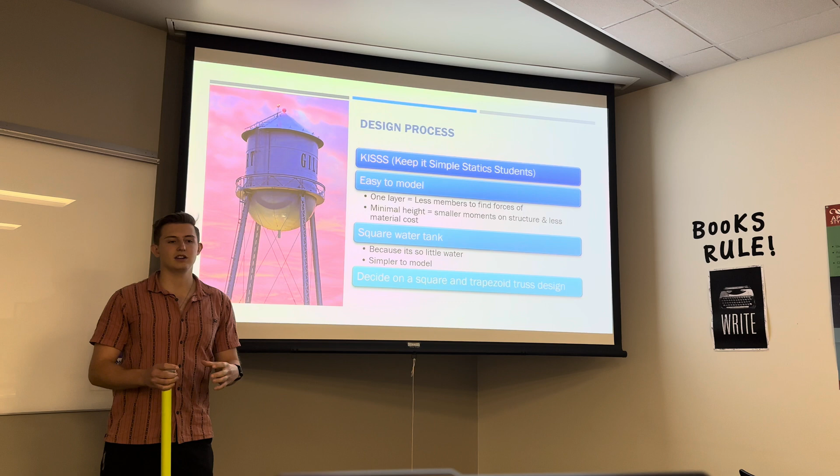Along with that, going along with making it easy to model, instead of making a round tank, we made this tank square. We were able to do that because there was so little water in the tank, so it just makes more sense to make it square, especially looking up all the ones online. A 300-gallon tank was square. And additionally, our final 2 designs were a square truss and a trapezoidal truss that you'll see further in the presentation.

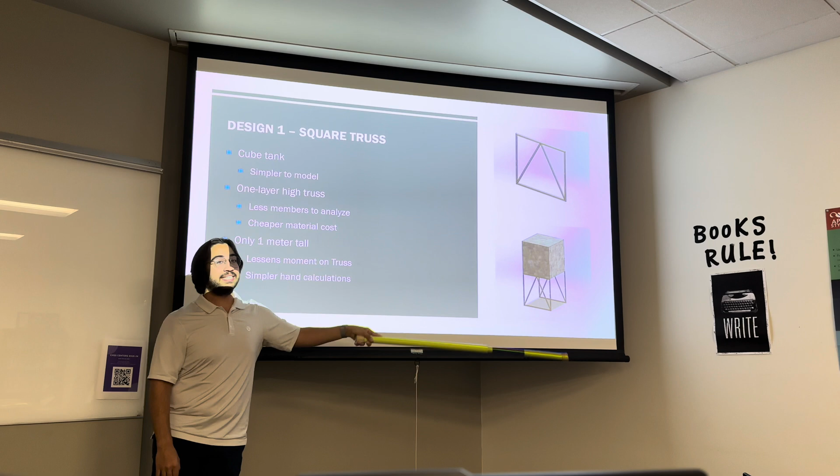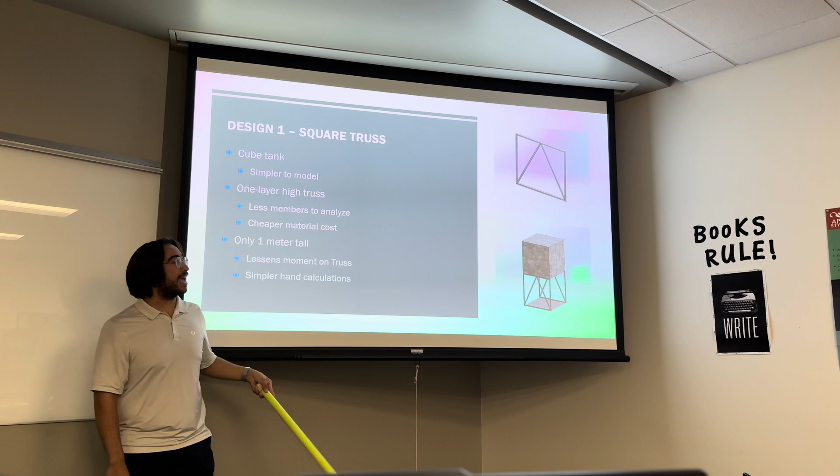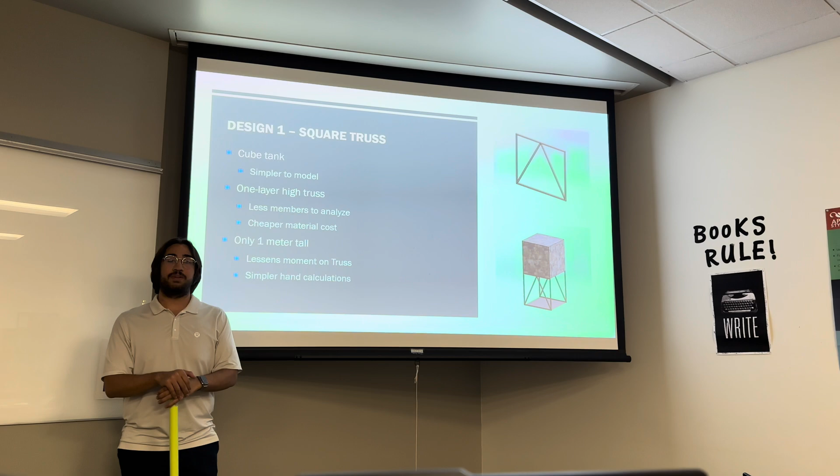We're using a cube tank because this is simpler to model. This is going to be made out of galvanized steel. And then we have a 1-layer high truss as seen over here. That's just simpler to model. It has less members to analyze. It's a cheaper material cost. We're using AISI 1020 steel, which is readily available. We are also only making it 1 meter tall due to the lack of a height minimum. And this lessens moments on the truss and it's simpler hand calculations for all of us.

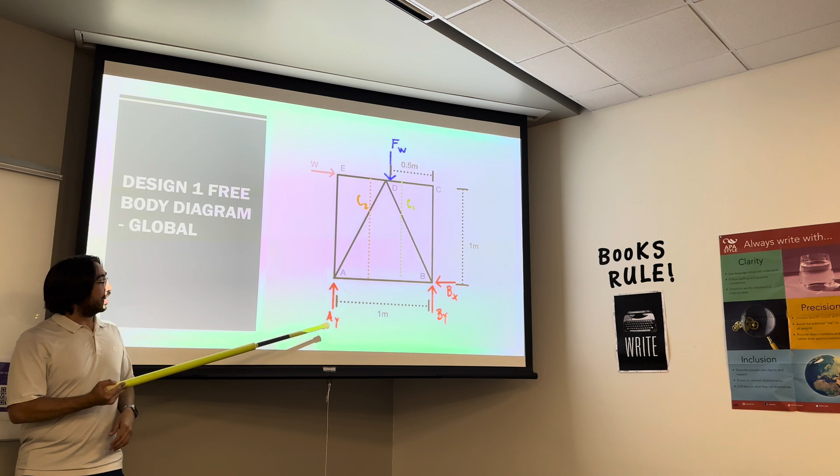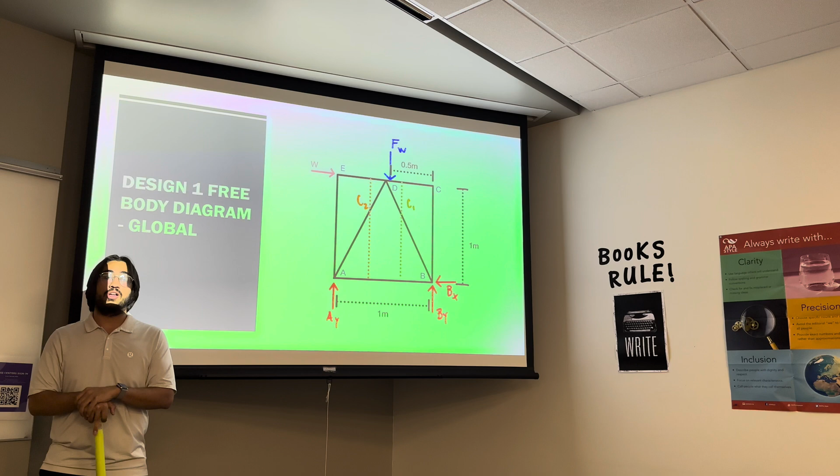This is going to be our global free body diagram of the first design, our square truss. We have our roller at A as well as our pin at B, and this global helps solve for those. The wind force at the top left was calculated using the average wind speed in the area. The force of the water at the top was the water alongside the tank as well. You have C1 and C2, those are going to be our two cuts, which we'll see in the next slide.

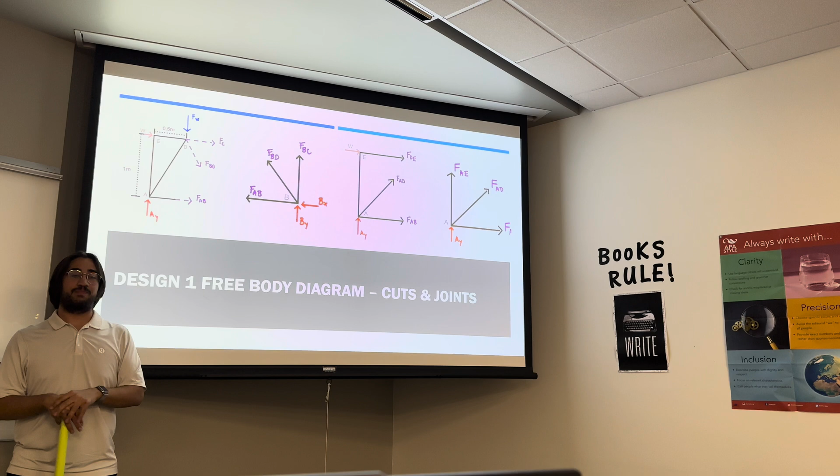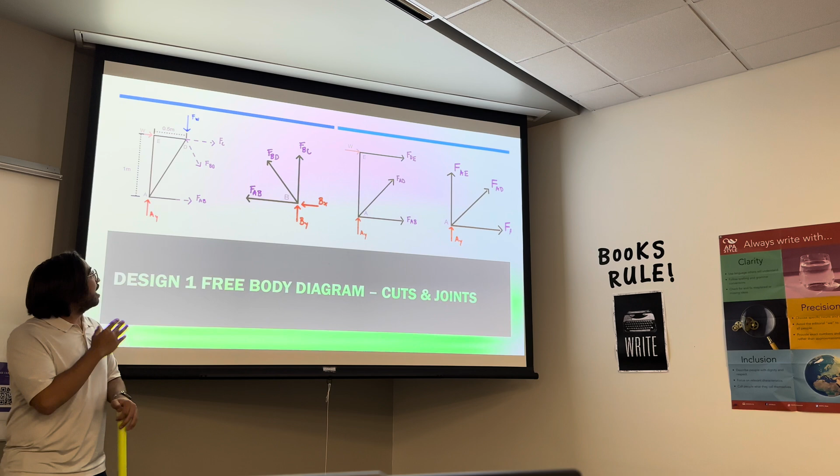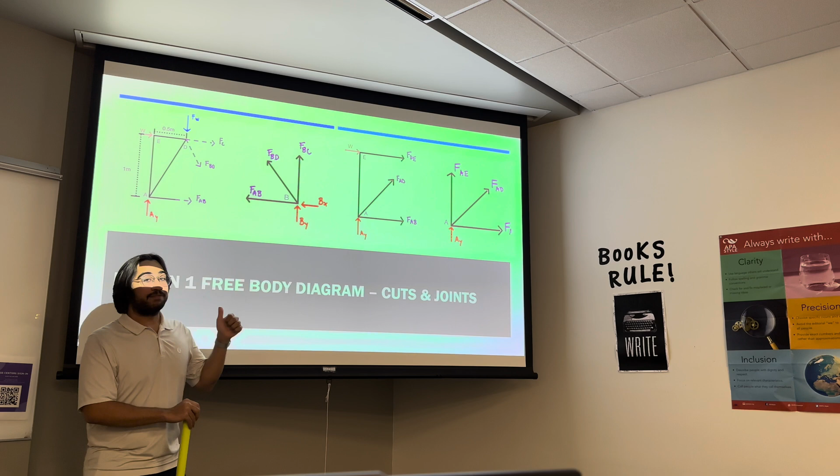These are our free body diagrams used to calculate our truss forces. So in the first cut, we're using AY, which we calculate with the global, and we're finding FAB, FBD, and FC. In the next one, we're using that FAB and FBD, and we're calculating FBC. And then we're also going to go on to the next cut, where we're using FAB from the first one as well to calculate FAD and FDE. And finally, we're doing another joint, and we're calculating FAE as well as FAD.

Our second design is our trapezoidal truss. This is using a rectangular tank, also made out of galvanized steel. And then we are using a one-layer high truss, similar to the first design. This is, again, less members to analyze. Although this truss features a wider base at 4 meters. Because it is obviously a wider base and more material, it is going to be more expensive. And this is, again, going to be only 1 meter tall.

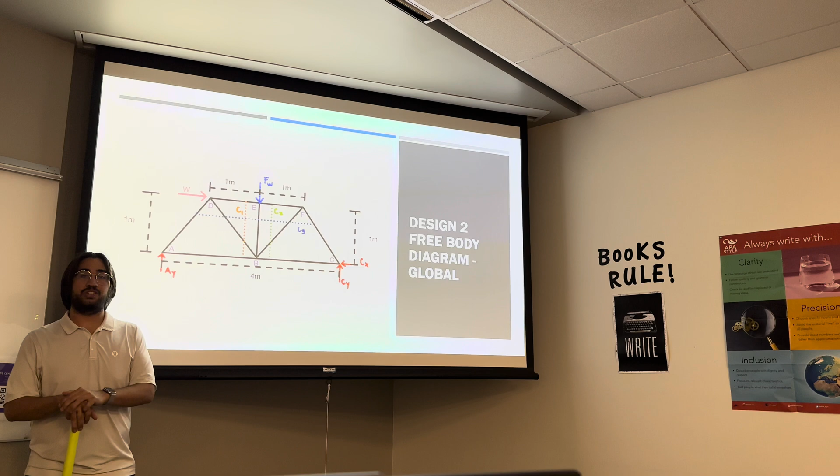This is our global free body diagram for design 2. It is going to be with our roller at A as well as our pin at C. The global, of course, is going to help us solve for those reaction forces.

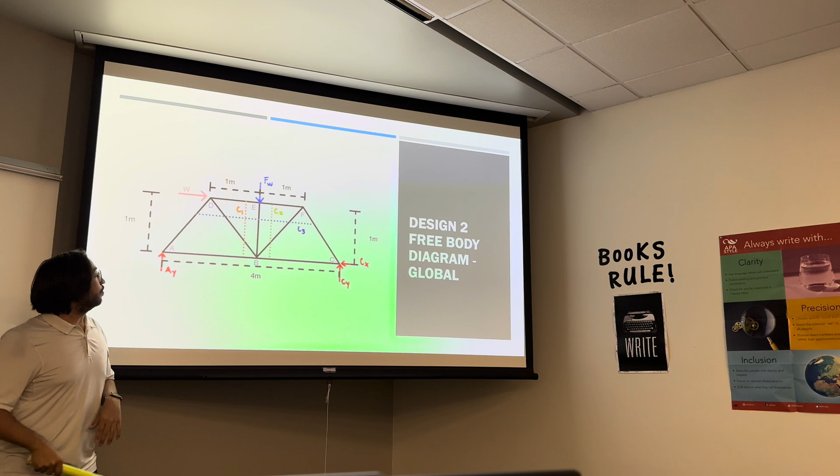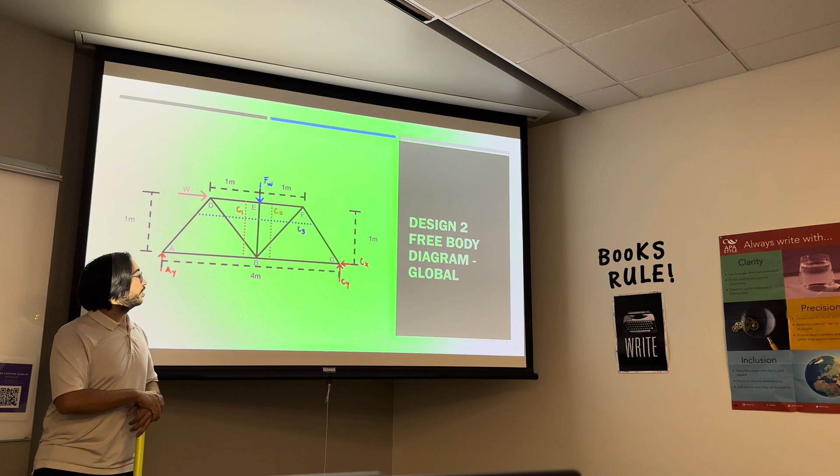We also have 3 cuts on this one as opposed to 2 on the previous, just due to it having more members. And then the wind force is staying the same. The force at the top, due to the water, is obviously going to be heavier because of the larger tank and more water that it can hold. Because each of the triangles have a side length of 1 meter, that made it also easier for us to calculate the different forces due to them being 45, 45, and 90 triangles.

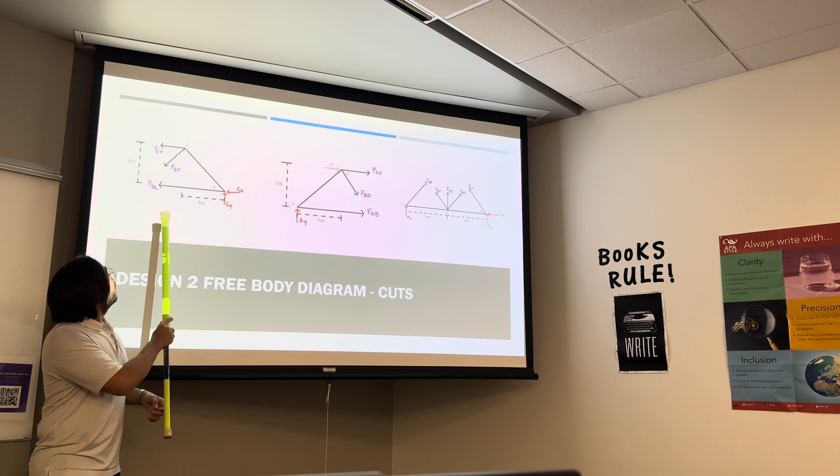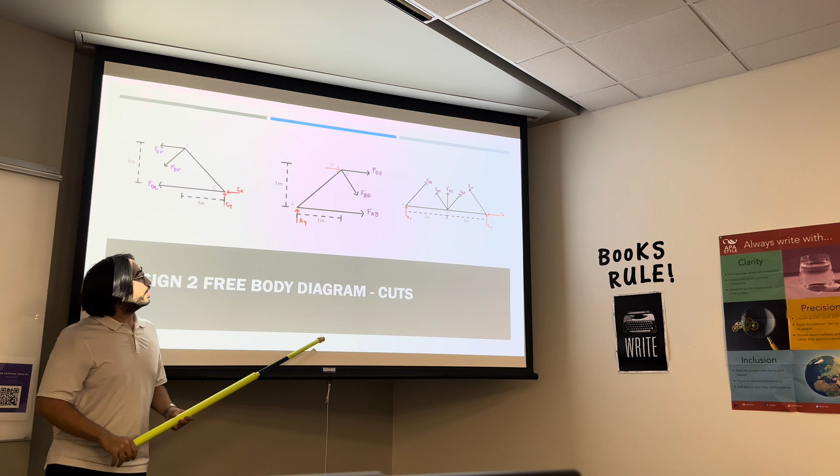For these free body diagrams of design 2, we only used method of cuts, no method of joints. And we're looking at finding FBC, FBF, and FEF on the first one using our reaction forces found at the pin of C. And then moving on to the second one, we again have 3 unknowns, so 3 equations, and we're using that AY force that we found earlier in the global. And then finally, we're going to be using the FBD and FBF to find FAD, FBE, and FCF.

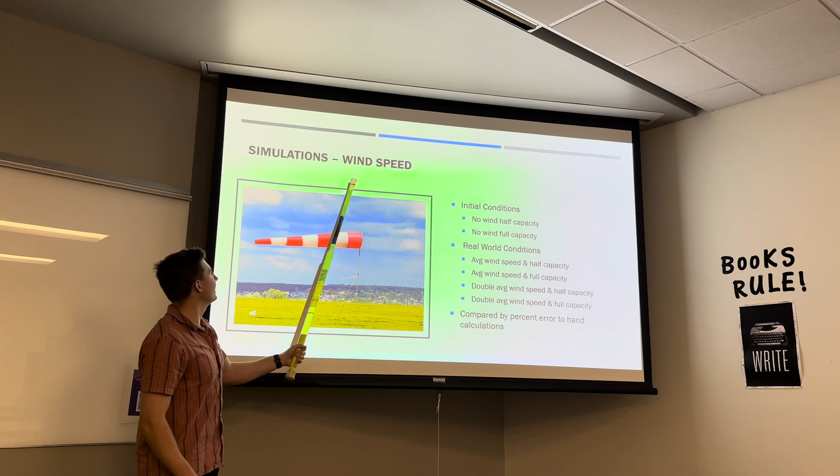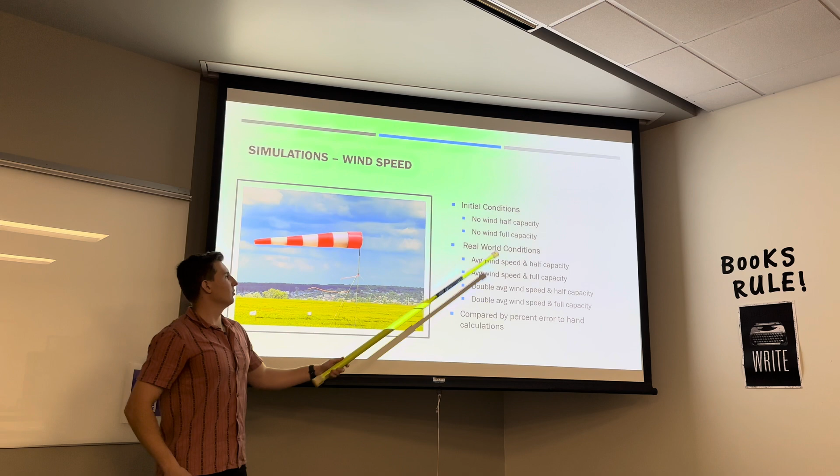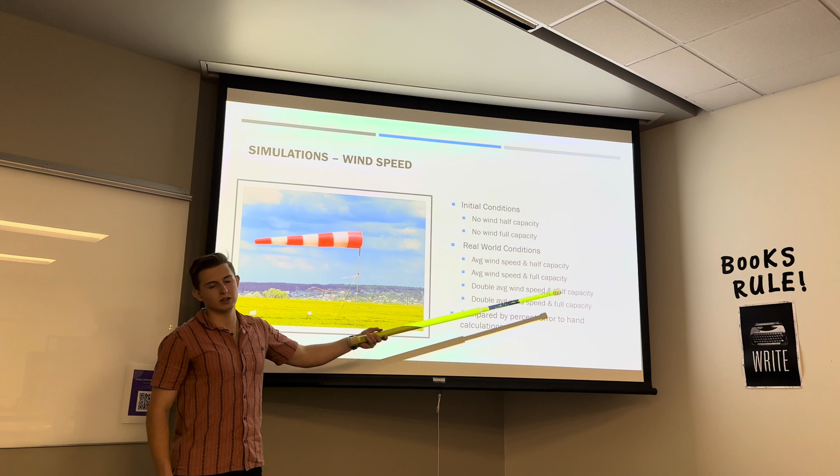All right, so now getting on to the meat and potatoes of the presentation. The whole point was to simulate it under real world conditions using wind speeds. So the first thing we did in the solver simulation was to do it with initial conditions. These initial conditions were with no wind on both of them. One of them had half capacity of the water and the other had full capacity of the water. Both initial conditions were run for both designs, a total of 4 initial conditions.

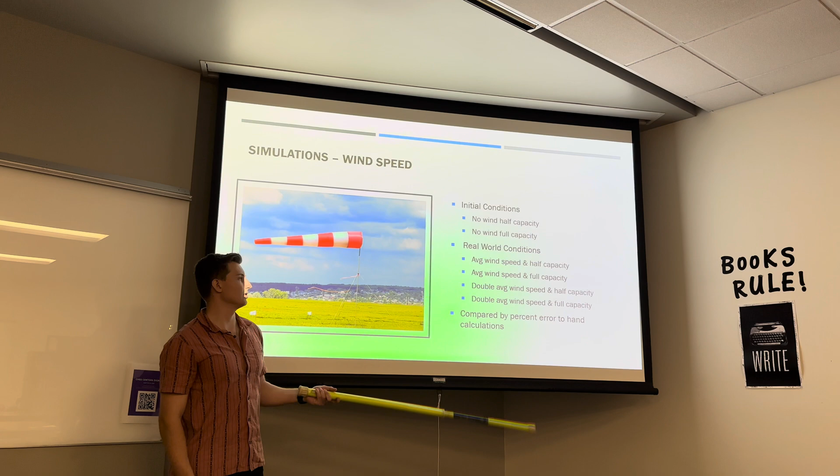Following that, we did it under real world conditions, or what we're calling real world. With this, we modeled the average wind speed as a point force on the left side of the truss at the top of the truss. For the first real world condition, we had average wind speed and half capacity. The second one was average wind speed and full capacity. The third and fourth were both with double wind speed, half, and full capacities. So for both designs, altogether, there was 8 simulations with the real world conditions. We used these conditions then to compare it to our hand calculations that we used our FBDs on, and to get a percent error to see which one was more accurate.

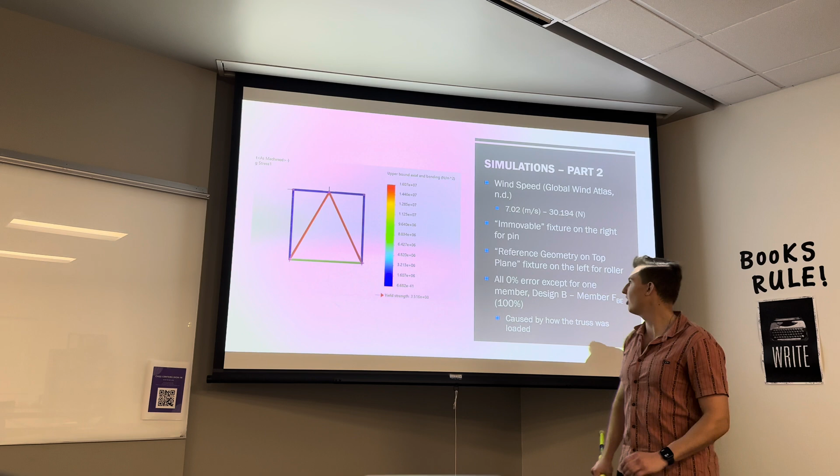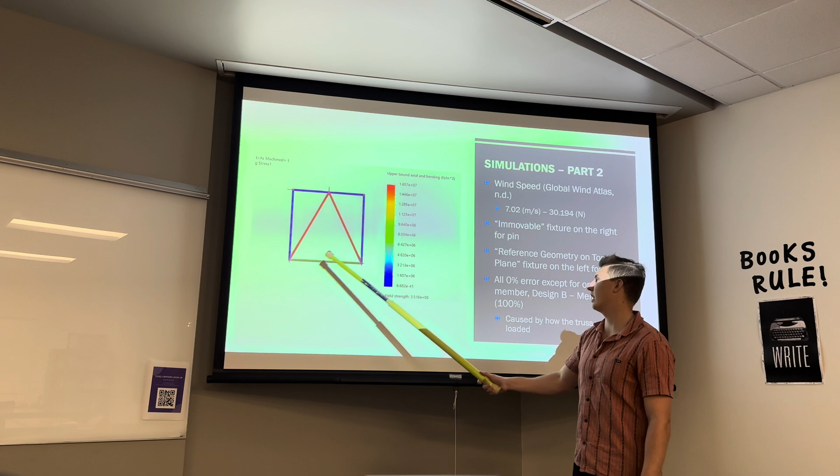On to part 2 of our simulations. Here we can see what it looks like in SOLIDWORKS when you do a simulation. On the simulation, we're able to model our force of the water directly onto that joint, and we also have our force of the wind at the top of that structure. Then on the bottom, we're able to model a pin using an immovable fixture, and that prevents the translation of both the X and the Y. Then on this roller on the left side, we're going to have, it's called reference geometry, and it's on the top plane facing upward. That prevents that translation going into that ground.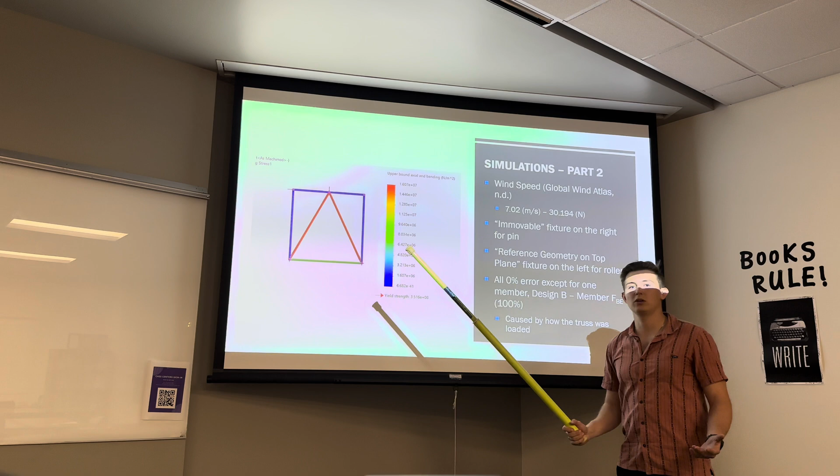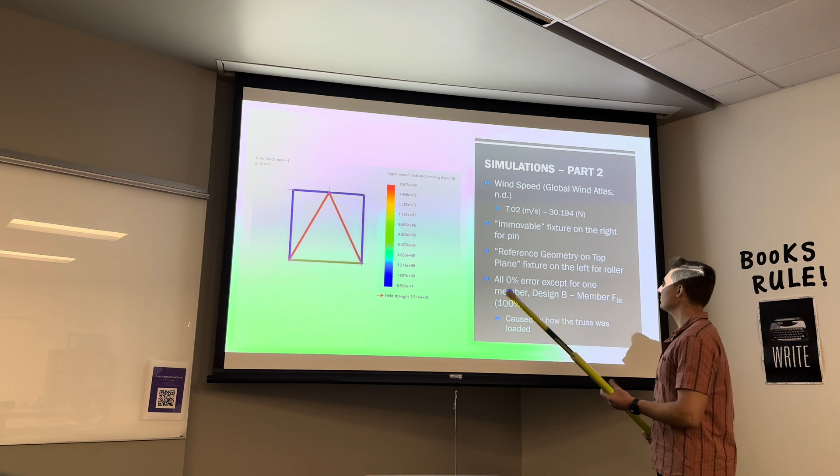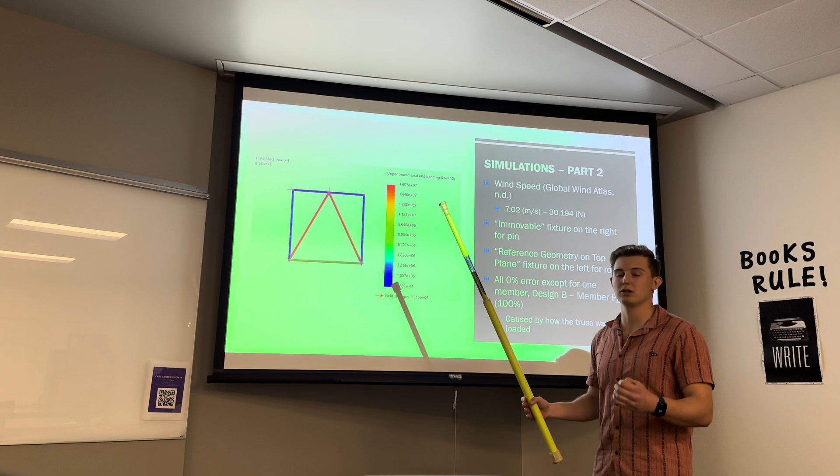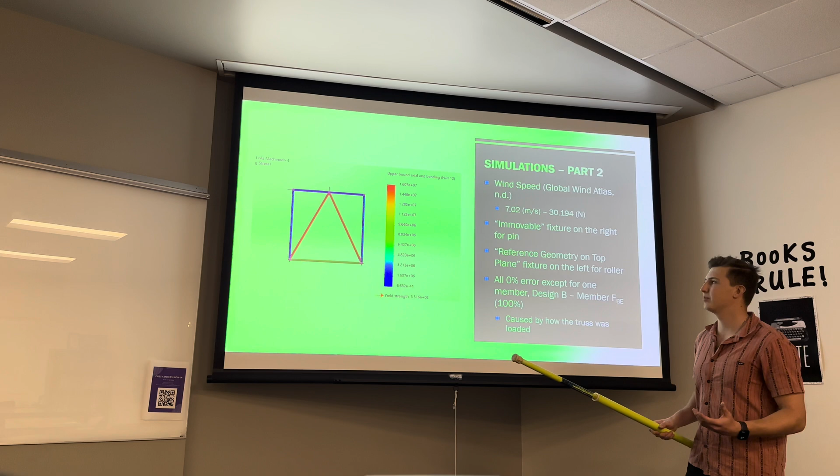From these calculations, we're able to calculate using the wind speed in our location in Somalia. The wind speed was approximately 7.02 meters per second, which then, when we put that into a wind speed calculator, that's about 30 newtons of force. Other than that, after completing the simulations, we found out that our SolidWorks simulations almost perfectly lined up with our hand calculations, having a percent error of 0% on all of them, except for force member BE. Force member BE had a percent error of 100%, which seems like kind of a problem, but it's simply because of differences in loading the truss as we did by hand and on SolidWorks.

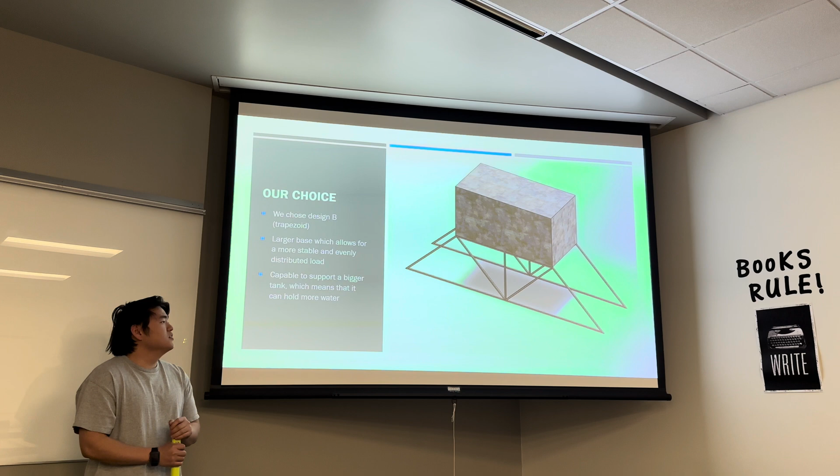Alright, after a few pots of coffee and a long analysis conversation, we chose design B because it has a larger base which allows for a more evenly distributed load, and this design can hold more water because of a bigger tank. As explained earlier, we used two materials which consisted of AISI 1020 steel and galvanized steel. For design A, which is our square truss, the total cost came out to $890, and for design B, it came out to roughly $1,500. However, design B can hold more water.

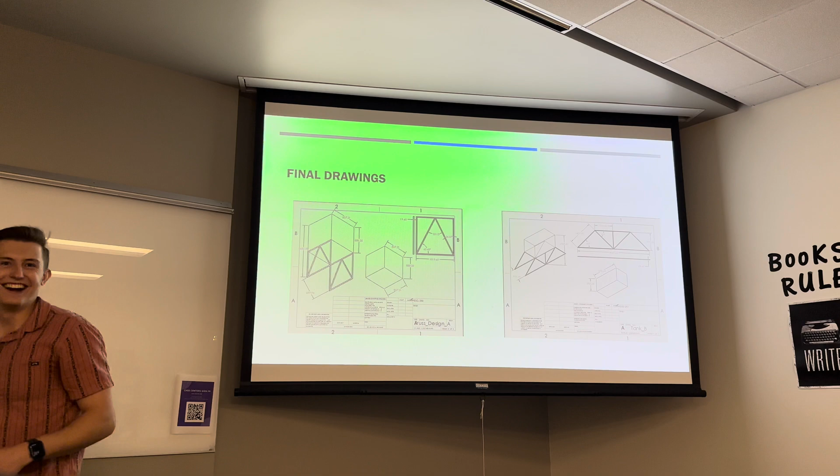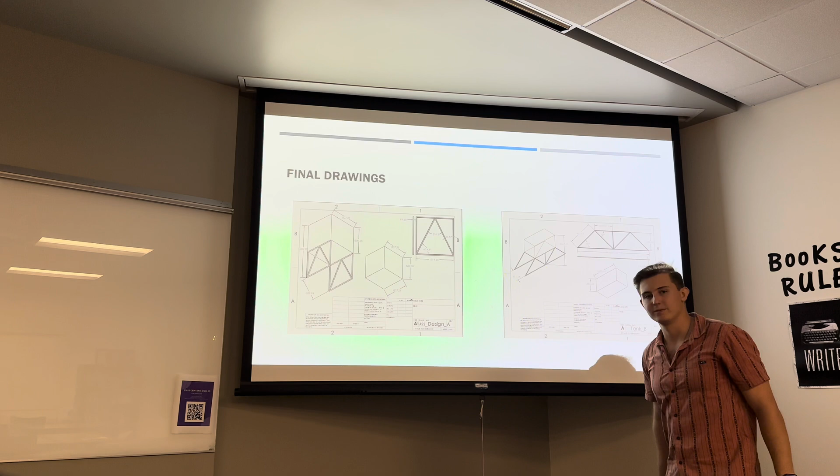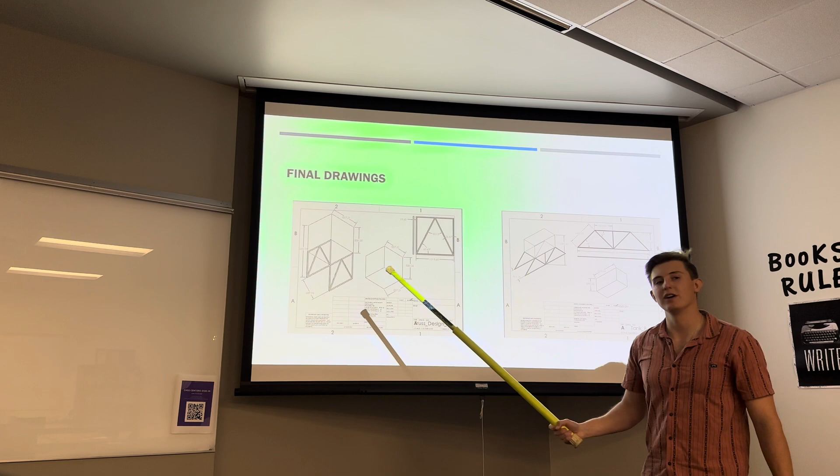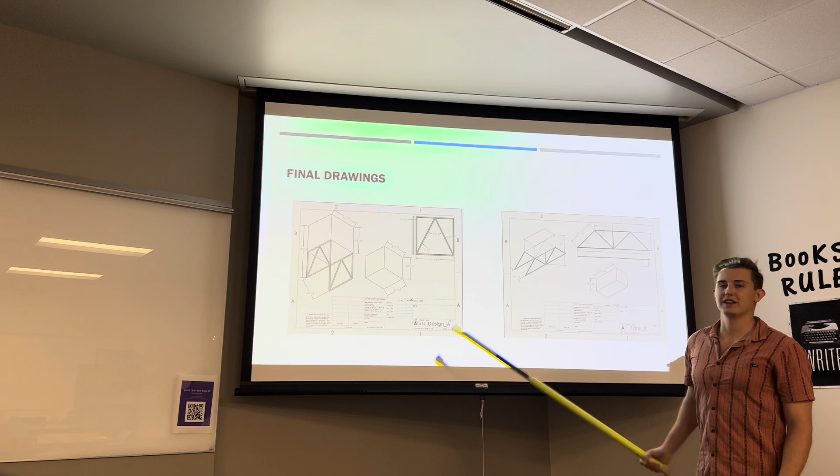Final drawings. So for this slide, we put together the drawings for design A and design B, even though we already chose design B. Man, I'm out of breath. For design A, essentially these final drawings are showing the final dimensions and final angles for the trusses to be put together. These final drawings will help our people when we send this in for them to put it together and verify that it's put together correctly. With this, they will use the directions we attach to the project, and they'll be able to put this tower together, lickety split, and have clean water.

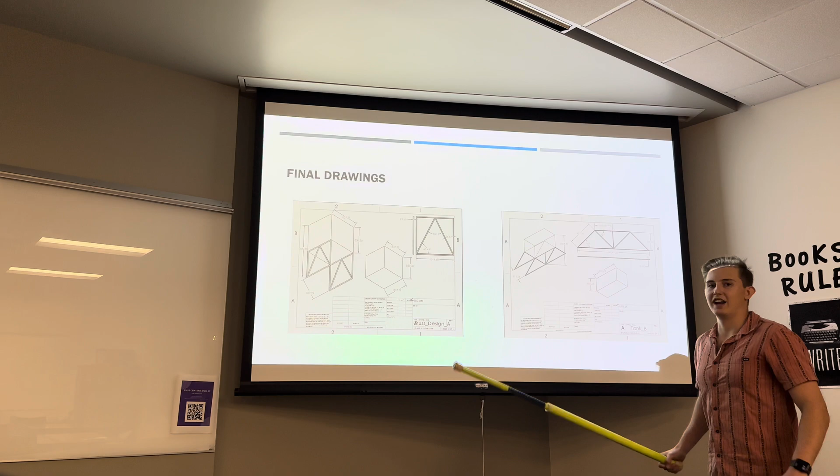In this presentation, we discussed two designs of a water truss tower to help the Somalian people have clean drinking water. The goal was to make a tower that could hold 300 gallons of water to give them 2 days worth of water. We performed rigorous calculations and simulation to make sure that our tower and our structure was up to par, and that any wind conditions that it experienced, it was still able to stand true and hold. In those calculations, we found that our SolidWorks and our hand calculations almost perfectly matched up to have 0% error.

On to you, Nate. Design B was ultimately chosen, and in short, the reason being that more water equals more healthy people. And as good, God-fearing Christians, we want to help as many people as possible. On to you, Avery. In the long run, we will allow these people to save money, and we will also promote them a healthier life because they have clean water.